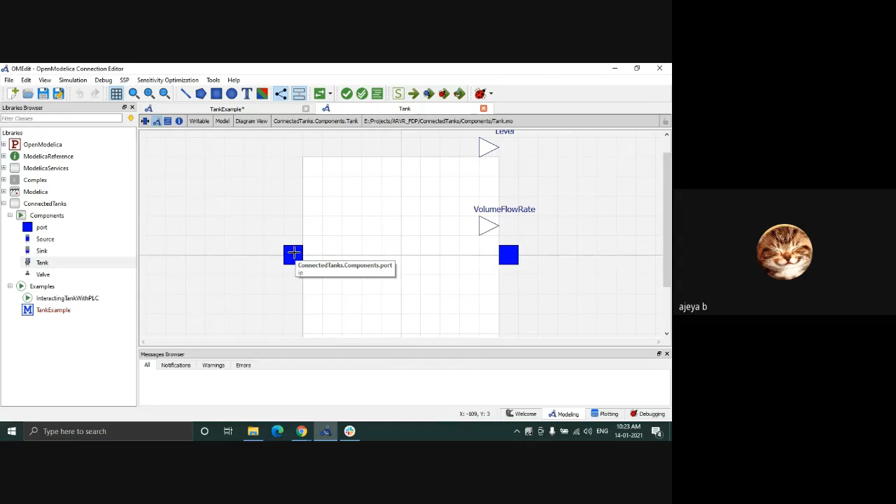When I'm talking about the tank, I'll just open the class and show you what each component is. The tank model has one port as an inlet. If you hover over any component, it'll show what it is supposed to be. So here, if I hover over this, it says component port IP, that means input port. There's one more on the right side, which is the output port. So these are the flow ports. Here, water flows from input to output with whatever pressure, flow, and temperature.

And there are 2 real output ports. Those are to take out the values from the tank model to outside. In object oriented fashion, we have written the code so that we have already made the set of components as such. Whatever values you want to take out of those components, we give it as real port. Then when you use it on an example, you can directly take this port and connect it to anything else you want, either to show it here, or to take it to PLC or VR. So you just connect from here to here. So from the component level, you have ports as a real output, and the real variable level value will be converted to real and sent out.

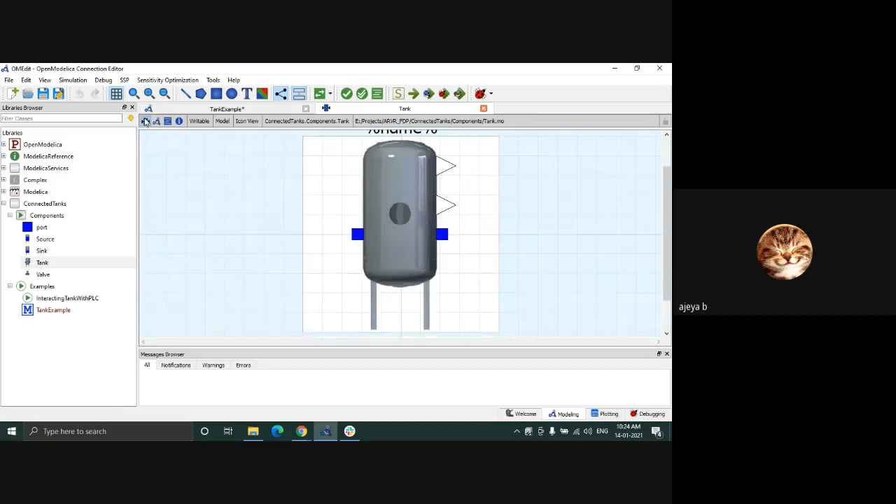So here I have put an image of a tank. In the diagram view or icon view, you can put the images how you want. Any doubts?

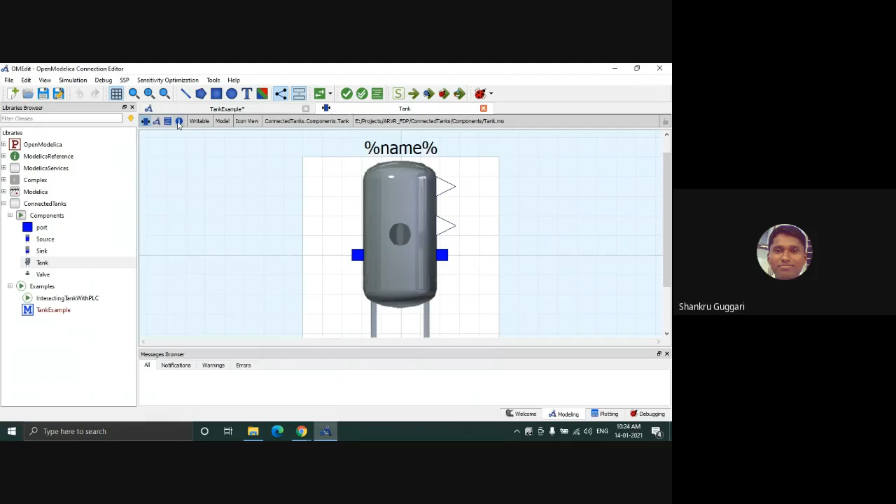Okay, so this is the code of the connected tank model. So whatever port I told you is there in the diagram view, in the text view you'll have the command line here: ConnectedTanks.Components.port dot IP, OP, real output level, volume flow rate.

And then a set of equations to compute the level, tank area, pressure, height - height in the sense the level converted in terms of percentage - and volume flow rate, which is what is going out of the tank. So these are a set of simple lines of code to compute area, pressure, and these things.

Water fluid is water as of now, so density of 1000 is taken. I don't think I'll need to explain each individual line because it may not be significant for everyone. The main purpose is that this is a model taken from the library, and now I'm going to connect them.

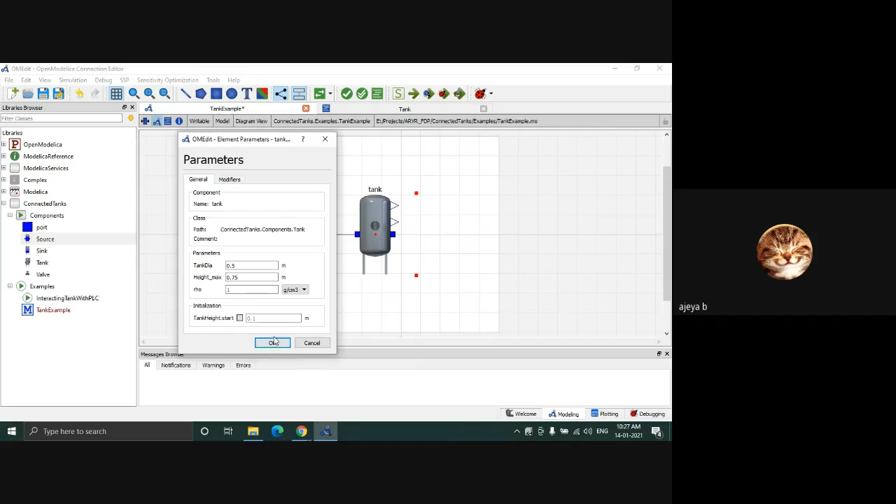These tank parameters, say tank dia, tank height, can be set if you just right click on the tank, and then you can see tank dia, tank height. Rho by default is 1, so you'll keep it as it is. Tank dia, say I keep it as 0.5 meter. Height I keep as 0.75 meter - this is the maximum height, or the full tank design. Then click OK, and that will set the size of the tank.

Now similarly the source - how much flow rate you want to keep in the source, water from source to tank, so you have 0.05 meter cube. Whenever we write code, we keep it in terms of SI units always, so there's no confusion in terms of units. So if you see on the first line of all components, you'll have import SI equal to Modelica.SIunits.

So for all the parameters, say height, area, pressure, volume flow rate, we take it from this standard library of Modelica SI units. So units from there we'll just take, so an instance of that library is created in this model called SI. Then you just have to say SI dot whatever the parameter - height, distance, flow, pressure, temperature, volume flow rate - and the corresponding SI units will be taken for that variable. So here, on the parameters, you'll directly get SI units without being given the exact unit for the same. You just have to import it.

So V naught is the volume flow rate of the water which is going to flow from source to tank - that is 0.05, I'll just keep it as it is. Now we have the tank, inlet is done.

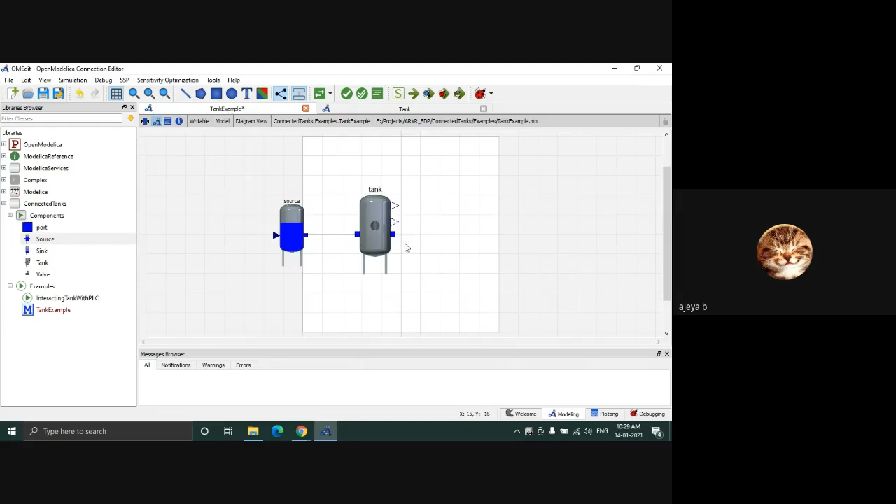Now outlet - so from tank it should go to something, right? So before taking it to sink or some other collector, we'll need to control the flow rate or the level in the tank, so I put a valve. And then I connect it from here to here. So this valve, I'll show this again.

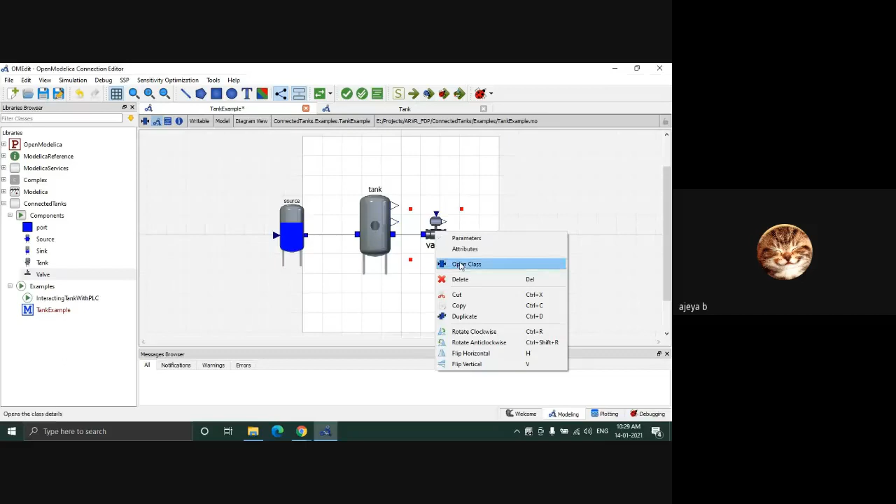This model has again input port and output port similar to that of the tank, because the ports will remain the same - the parameters we are passing from one module to other module are same: pressure, flow, and temperature. But here temperature remains same, there's no change in the individual model on the temperature. We are basically looking for tank level and volume flow rate in the whole example.

So I'll go back to valve. Valve has an additional port other than what we already seen, that is a real input. So real input is a real value from an example or external to this module that will give a real input to this module. That is here, valve opening.

So how much is the percentage, how much is the opening of the valve, in the range of 0 to 1. 0 being valve completely closed, one being valve completely open. So that way the equation has been written.

So that valve opening you'll get from the real port, and it'll be external to this module. So from outside I can directly give a real value here, and this gives the opening of this valve, so that every time I don't have to go inside this module to set the valve opening and then come back to the example. So again, making it object oriented.

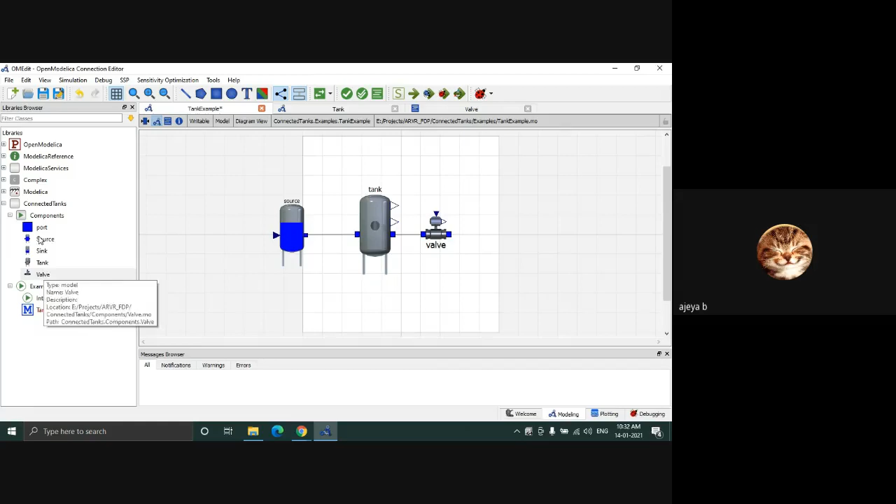Next, from here we'll put a sink to terminate the water flow. That is, what is happening is: from source, water will come, it will accumulate in the tank. According to valve's opening, outlet flow rate will happen from the tank, and it will go to sink and accumulate there. So in the sink, we are not setting anything, we're just making the pressure as 0 or ambient.

So there is no pressure here. So the water flow rate from here, this will be the high pressure side, and water will flow through this like this from left to right.

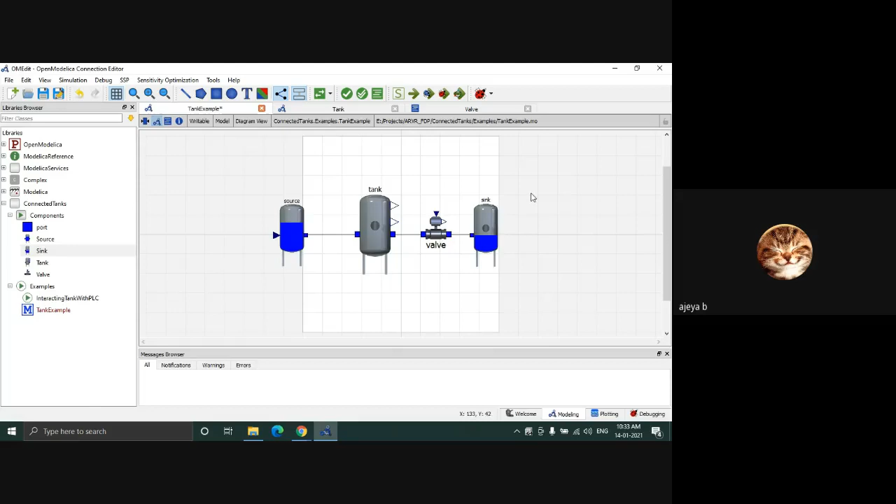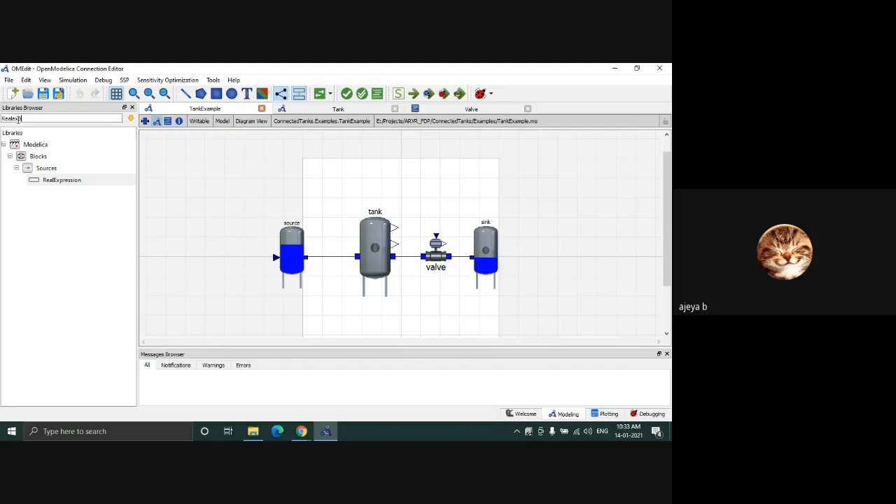Now, I told you that we'll need to give the valve opening, right? That is done by a real expression. So in Modelica standard library blocks sources, there will be a port called real expression. If you type in the search bar 'real exp' or 'real expression', you will be able to get it. You just drag and drop it here, click it, and then connect it. Save.

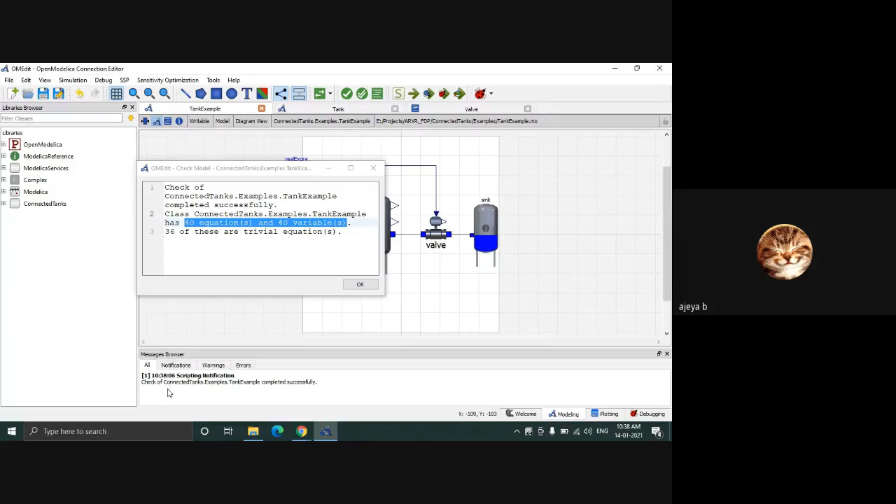Now, to check if there's any mistake, you take the check mark. In this check mark, you should get 40 equations, so equal number of equations and variables - 40 equations, 40 variables - and there shouldn't be any error in the message browser. That means you haven't made any mistake, and everything is good. Now we can run the model.

I'll run the model. I'll keep it for 100 seconds with an interval of 0.2, and then run.

Now the model has computed, and you can see the results here. I'll go to tank. Whatever parameters you have set will be in the rectangular box, while whatever variables have been calculated by Modelica will be without the boxes. So if I go to tank height in percentage, this has gone above 100%, you can see. So what it means is that the tank has gone into overflow.

I had set the tank valve opening as 0.5 here. So with 50% open on the valve, the tank will overflow. So I'll make it fully open and run it again.

This way you can see the behavior of tank level with respect to valve opening, and how it will change.

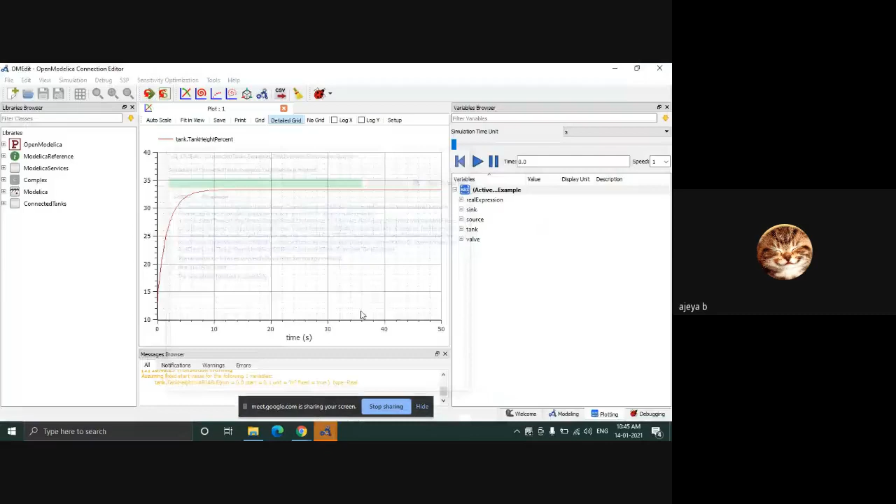So here now, what I did was, before the interruption, I had changed the valve opening from 0.5 to 1. So now the valve is completely open. Now you can see that the tank level has saturated at 33%.

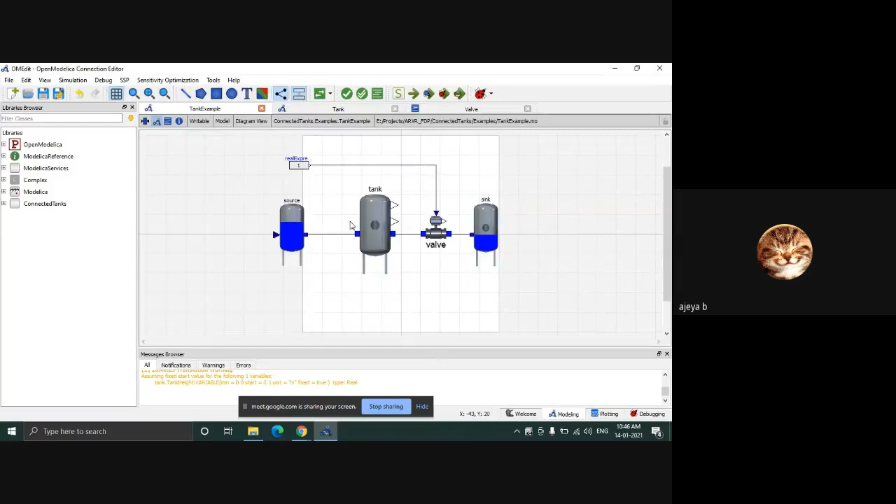So now in the tank, source is continuously coming in, source is continuously sending out water. Tank level has risen from start up to 33%, and then whatever is the additional flow is going out to sink continuously. So after 33%, there is no accumulation because there is continuously a flow going out of the tank. So it has saturated at 33.3%.

So this 33.3% is of the whole tank height. The tank height we had set was 750 mm, or 0.75 meter. So now the water level is 33% of that maximum height.

Now what you can see is these output ports, what I had mentioned before, right? So those are mentioned in the tank itself. So one is the tank - if you go here and hover, it is a real output level.

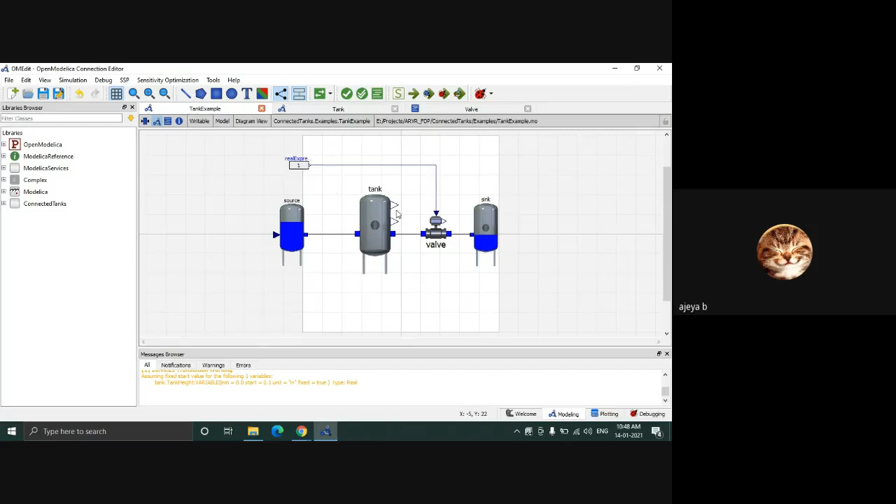So that is same as that of the height percentage. The difference between this level and the height percentage level, we can take it out directly just by connecting it to any other component that wants to share the data later. But the height percentage value inside the tank model is not easily shareable. That is the main purpose of using the real output.

Similarly, the volume flow rate is here. Inlet flow rate I had given as 0.05, and at the end, outlet flow rate also matched the same thing. That is nothing but volume out, which again is the internal variable for the tank. This volume out is taken out by the real variable, real out port, as volume flow rate, so that we can take it out of the model and share it with other modules at a later stage.

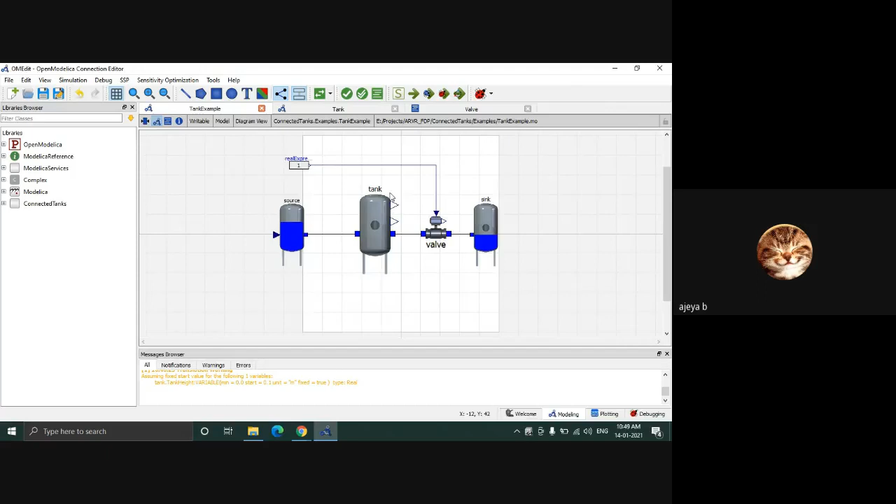So that's about making a model object oriented, and how you can share the data, make the data available for sharing. Next, we'll see how we can share this data. Up till here, is there any doubt?

Okay, so next is taking this model data outside of OM Edit. You do that using OPC UA. In the last session of Open Modelica, you had the bouncing ball example, taking it out from Open Modelica to VR, where you used a Python client to connect the data and then the VR.

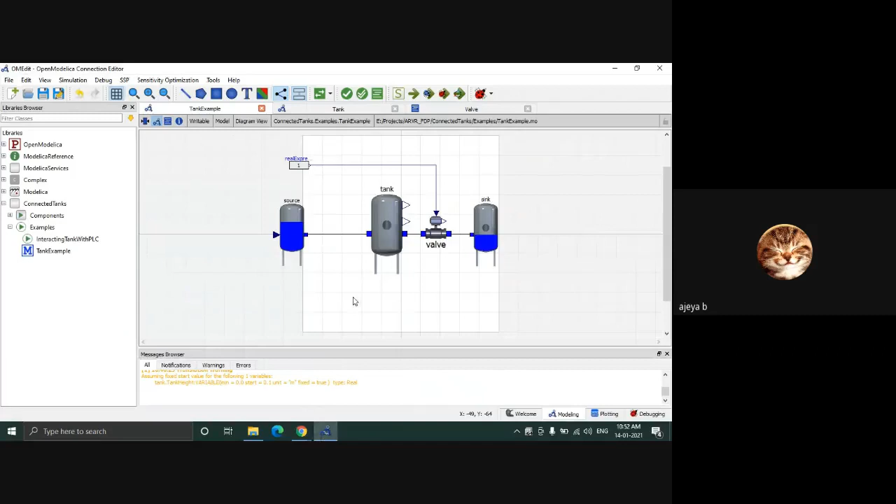Okay, now what we can do is this: go to the example that was already there, the interacting tank with PLC. If you double click that, you can see it is similar to the example I had shown here, but the only thing is that I have taken it out and put some more ports. This is how we connect it to CodeSys or the PLC.

So what you do is give whatever variables you want to take out a common name. Here, the real output level of the tank is taken out and given as O tank level, indicating that it's an output from Modelica and the variable is tank level. Similarly, volume flow rate is O tank volume flow rate, again indicating it's an output from Modelica with variable tank flow rate.

Same for valve opening feedback. For valve opening, it's an input to Modelica, so we have indicated it as I valve opening. Now for CodeSys, the variables we can access are I valve opening, O tank level, O tank volume flow rate, and O valve opening feedback. These 4 variables will be available in CodeSys, where you can visualize these 3 parameters and give set valve opening also.

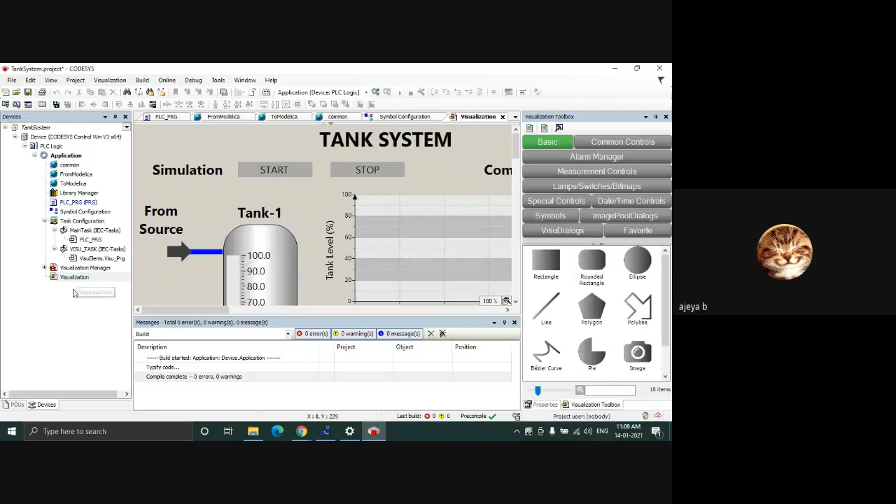One visualization I have created already, which has this set: this is a page for the tank system. From top, it has two buttons, simulation start and stop, an indicator for whether communication is okay or not, a rectangular box indicating the tank, and a bar graph or bar scale which will show the level at any given point of time, and here in text it will show the tank level in terms of percentage value.

Here it will show outlet volume flow rate. This symbol indicates the outlet valve, and this value will show the valve feedback — how much, at any given point of time, is the valve opening — and this slider where you can adjust the valve opening from 0 to 1.

Before we were doing this through the real expression, right? Similarly, now we are doing it through CodeSys visualization. So in real time we can change the valve opening and visualize the change in tank level. Same thing, we can use this block to enter the value also.

So to visualize the data here, I have created local variables and then assigned those local variables to global variables. You can see from Modelica, the valve opening feedback is assigned to outlet valve opening feedback, which is then displayed here.